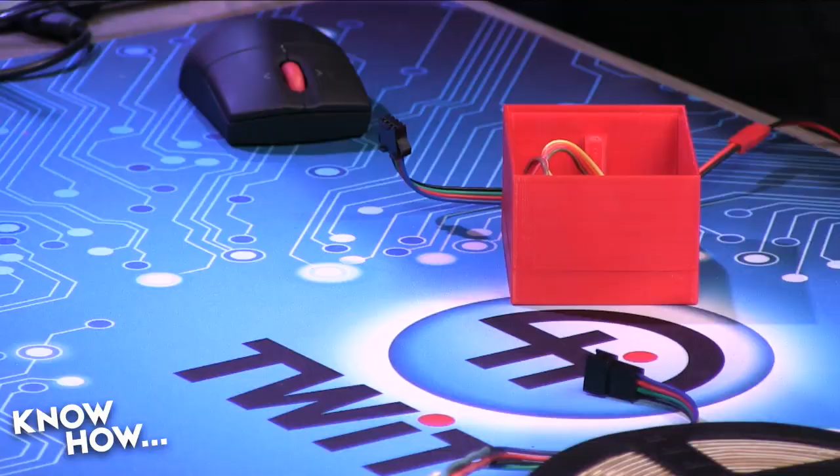Now, if you go over the overhead out here, Alex, inside, super simple circuitry. There's this, that's an Arduino. We've seen those before. Those cost about $3. This is the new piece. This is actually an Arduino-driven LED driving board.

Now, we've got a link for this, Alex. It's going to cost you about $8 to $9. I actually bought about 30 of these things, and it got the price down to like $2 each. They're really, really useful because they allow me to do something like a WS2812, but at a greatly reduced price point. A strip of WS2812s this length will probably cost me $30 to $50 versus $10. So obviously there's some price performance here.

All right, so let's look at how this looks. I've got this wired up. I'm going to give it 12 volts. I can actually give it anywhere between 12 volts and about 15 volts before burning this thing out. It's going to go through this little UBEC.

The UBEC's going to supply 5 volts to the Arduino and 5 volts to the driver board, but the LEDs are going to get the full 12 volts. And this is what it's going to do. So I'm going to go ahead and plug it into this, like so. And I'm going to take my power and plug it in here, like so. Or I'll do it the right way.

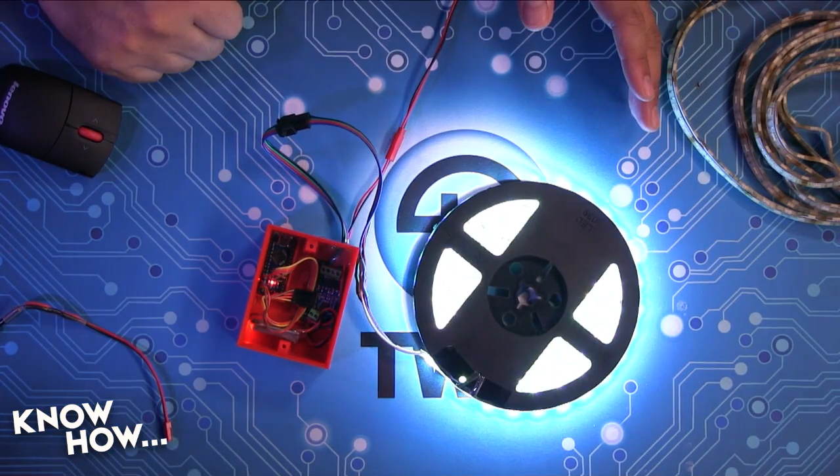There we go. So the code that I have written on there, all it's going to do is flip between the 3 colors. So it's going to go red, green, blue, red, green, blue, red, green, blue. It's sort of on an automatic cycle thing here. And we'll show you the code in just a bit of how this actually works. But this is super, super simple.

This is probably the easiest way to get your workspace illuminated, and it wouldn't cost you that much. What you see right here between the driver board, the Arduino, and the strip, this is less than $20. So for $20, you get 16.4 feet of LED strips, and you can put it anywhere.

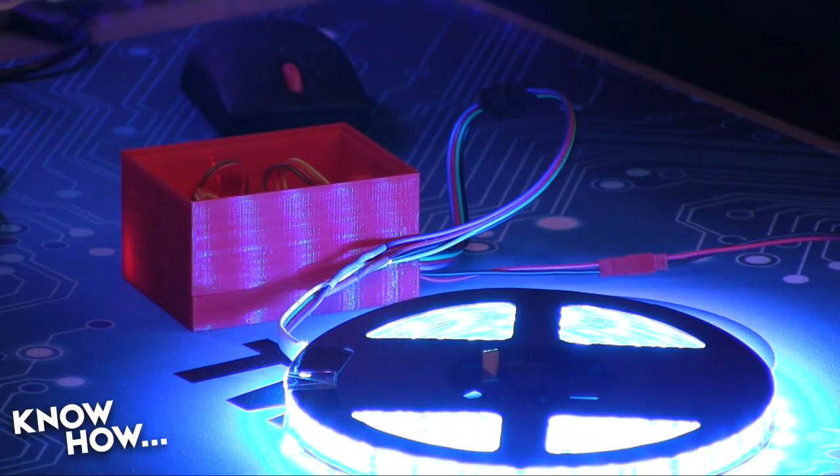Yeah, wow. Yeah, it's kind of nice. It's kind of mesmerizing, actually. Look at that, it's comfortable. Yeah. Okay, that's done. Sorry, what were you going to say? Oh, I just... waking you up from your daze, my Zen nap.

All right, so what we're going to do here is we're going to go ahead and show you a little bit of the code that actually makes this possible. Alex, if you go ahead and switch over to my computer while I get the Arduino connected, very simple code.

There is a library called rgbdriver.h. I'm actually going to include this in the file that will be downloadable via our show notes, so you don't have to copy anything off the screen. This will allow my Arduino to address the driver board, so it will give me all the language I need. Now, this just gives me the clock pin and the digital pin. Those are two things that are on the board. I'll do a full episode on this later on. You don't need to know that at the moment.

And then there's this, the setup. There's nothing, I don't need anything. It's super simple. And then for my program, I'm just running this function called fade. All this will do is it will go for red, start red at 0, and then go up to 255, and then go blue from 0 to 255, and then green from 0 to 255, and then go backwards. So yes, that's all it does.

It fades in the red, fades in the blue, fades in the green, and then fades out the green, fades out the red, and fades out the blue. And that's why it goes dark at one point. Precisely, so it's just values. Unlike the WS2812s, because we'll talk about how WS2812s work later on in the show, where I'm creating an array of data and then sending down commands for each LED, this, I only get one command. So I can say how bright is my red, how bright is my blue, how bright is my green. That's the only thing I could do. Very simple, very easy to program for it.

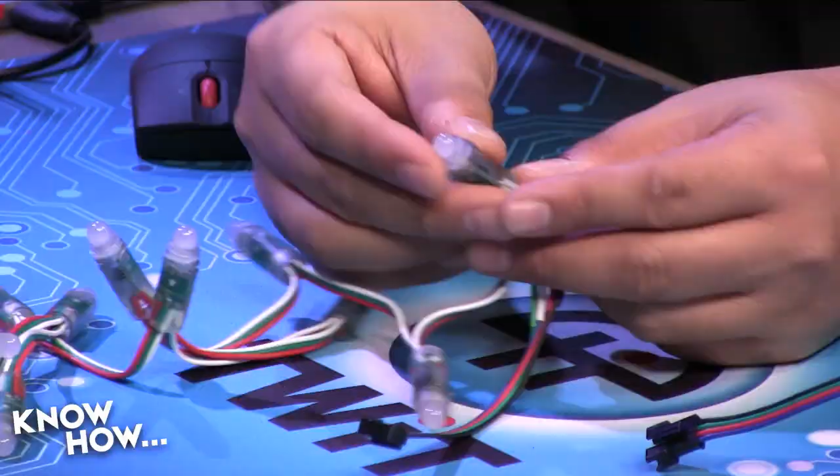If you go to the side view, Alex, I can show people. So that's the LED, that's the IC, the little chip that allows me to control each individual LED.

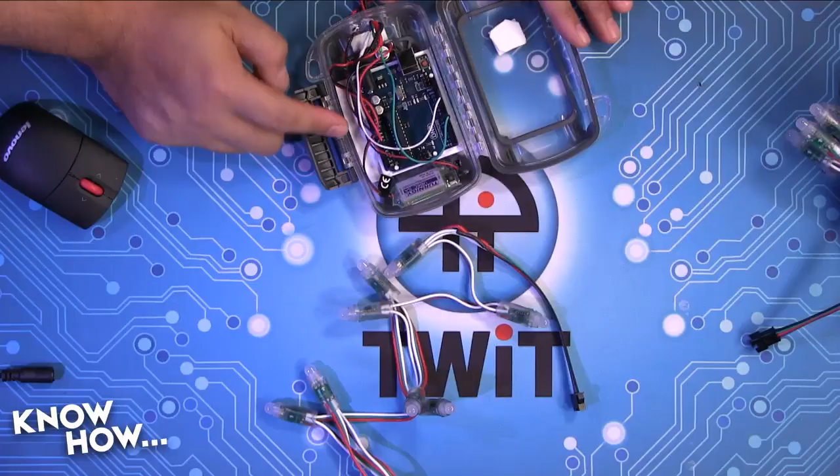We've got a project I think we made about 3 years ago. I pulled this out of my kit. This was an Arduino inside a waterproof kit. I'm going to plug this in, give it a little power. If I'm right, it should already have the code to run a strand of 50 of these WS2812 LEDs. Let me get the right power connector, like so, and I've already soldered on connectors. I actually need your side, oh it's on the wrong end. Okay, I'll just take this, plug this in, and if it's got the right code... boom, there we go.

Oh, twinkly. If you bring the lights down a little, Alex, we can get Christmassy up in this joint. Right now I'm running some default WS2812 animations, it's allowing me to go between fades and chases. You do look kind of Christmassy there. I'm a Christmas tree. You are a Christmas tree.

However, what he wants to know is, can he link another strip of lights to the end of that? So if you give me that, let's try it out. I'll plug this in... and, no.

Womp womp. The reason why it doesn't work is, remember how I told you that in a WS2812 strip I generate an array? Your array only goes up so far. Precisely, there's 50 lights inside of this. What's happening is this generates an array of 150 values, each light takes 3 of those values. So by the time I get to the last of the 50, there's nothing left in the array, nothing to pass. So these lights have power, but they have no commands.

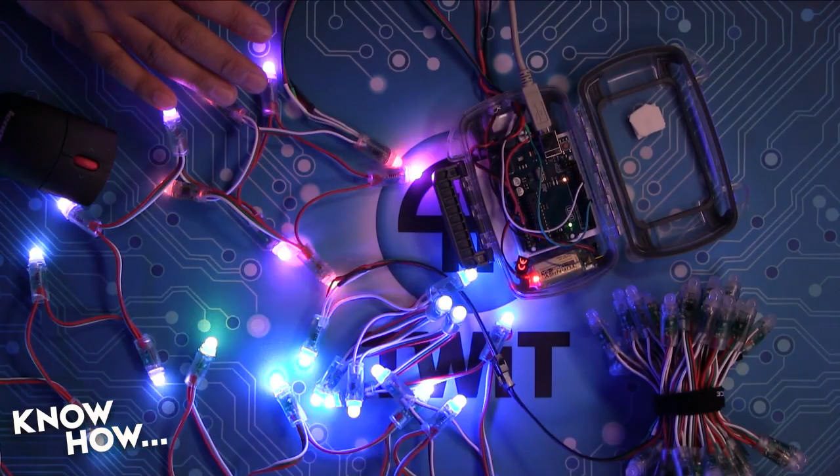Still compiling, it's about 80%. When this is done, it will upload the code to the Arduino, and automatically, assuming I've done the connections right, that strip should start to light up. Okay, here we go, so it's stopped because it's uploading. It's done uploading. And there we go. The nice thing about this is it's actually going to continue the animation pattern, so it's not just that I've lit it up. It now will do the animation over the entire string. Oh, it's starting. There you go.

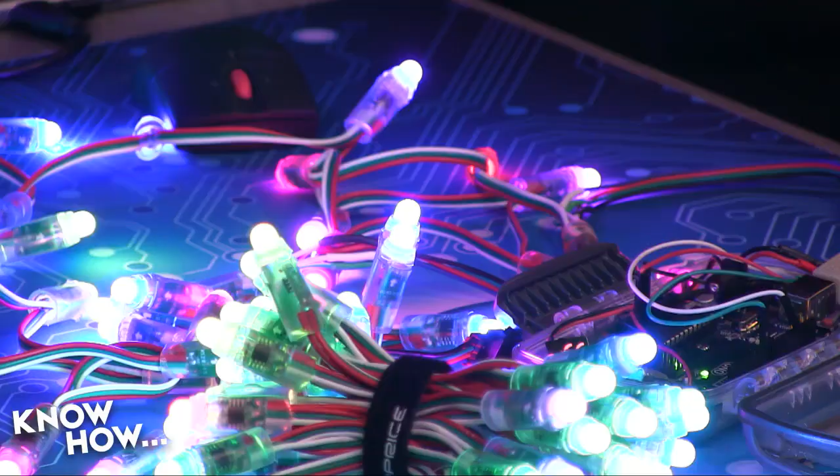Now, there is a limitation, and the limitation is all about power. Each of these will use up about 50 milliamps of juice at its maximum brightness. You add that up, and yeah, you kind of need to put a lot of juice down there. He's got a bulky power supply. At issue, though, is the fact that you can't really push that much amperage down this gauge of cable. You will eventually just burn it out.

So what I've typically done is I will send 12 volts down a parallel line, and then I will break that 12 volts down to 5 volts at the end of every strip. That way, every strip has a fresh supply of power, and it works. You can just keep putting these on as you add more lights. It's much better than accidentally setting your house on fire. Again, with the fire, my gosh, we've got so much fire.

He's got two garage doors to cover with this, so that's going to take a lot of these lights. Well, you know, actually, you can make it across an entire garage door with one string, I've done this. So if you wanted to go all the way around, you'd need three strings. Right, yeah, okay, not bad, not bad. It's kind of fun, and I love playing with WS2812s and 2811s.

Unfortunately, it's probably too late for you to order any of these. If you just have the standard WS2812 strips, the LED strips, it's the exact same code. The cool thing about this is they're designed to be hung outside, they look like Christmas lights. I can actually drop these in a bucket of water and they'll keep going.

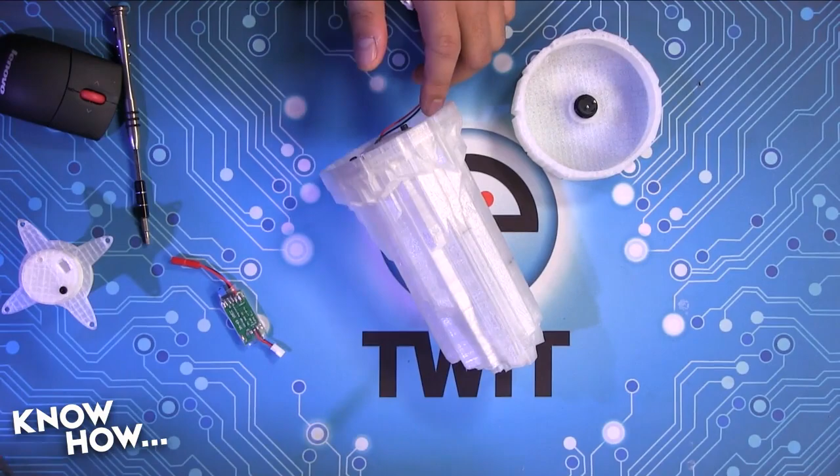This is probably - I say it's version 2, but it's really version 2.15. I've probably done 20 different iterations, and most of them I didn't print. In the early versions it was just using the standard WS2812 animation. I've kind of changed it to make it more ZPM-ish, so it does that golden glow.

Now there's a couple things we're going to have to do. First of all, the real ZPMs on the show have black lines in between the individual crystals, so that's going to have to be painted in. But I wanted to show people a little bit about the design and how we actually put this thing together. So this is actually multiple parts - you've got the shell, and I'll show you how we designed the shell in just a bit.

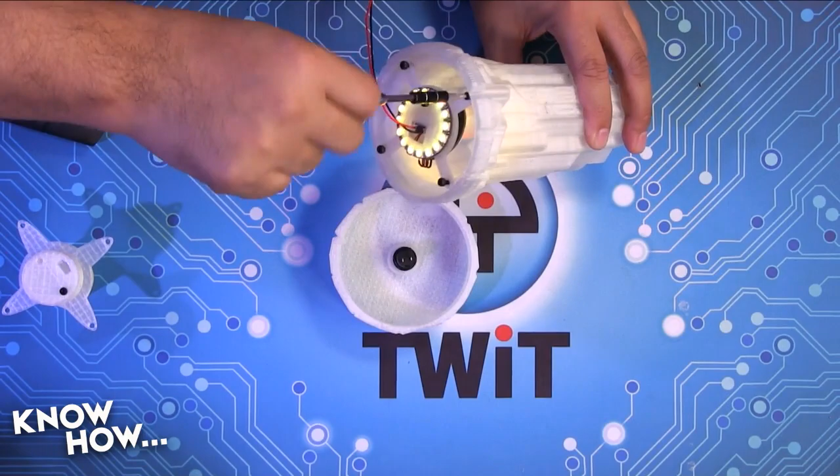But I've got this core, or what I'm calling the pod, that has been attached to the ZPM. This is how I get it to illuminate. Again, it's just WS2812, but the design allows it to illuminate things inside without being seen, because if you can see all the machinery that's causing it to do this, it kind of destroys the illusion. So what I did was I created this.

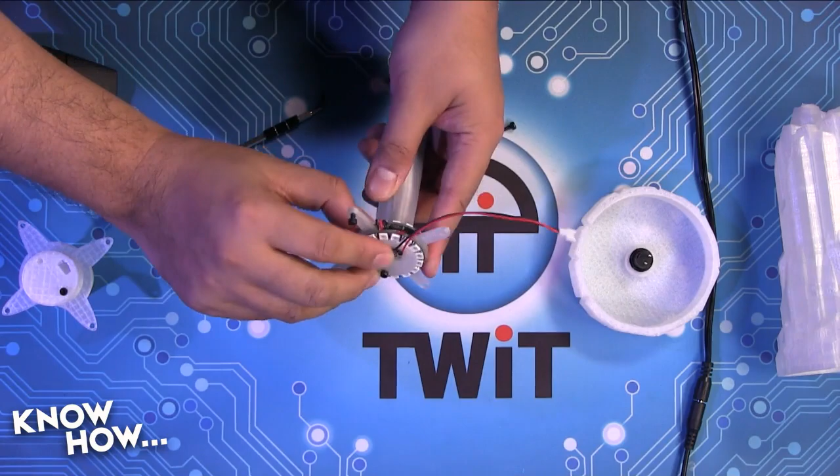Let me disconnect it so the light's not so blinding. This is the lighting pod. I've got two WS2812 rings, one on the top and one on the bottom. This long tube contains the Arduino plus a 4,000 milliamp hour lithium polymer cell, so this will drive the Arduino and the lights for something like 5 or 6 hours before it has to be recharged.

Now this is not completely done, but you can see how I've gone from the earlier design. This was an early design, same idea, where I've got LEDs on that side and LEDs on this side. In this particular case, the Arduino was stacked on top of the battery, but when I did this, the top of the shell wasn't colored because this was blocking the light. So what I had to do was stretch it out, but now this doesn't get in the way of that light. By the time the light gets up to this part, it's bouncing off so many surfaces that it's just diffuse. Kind of a cool setup.

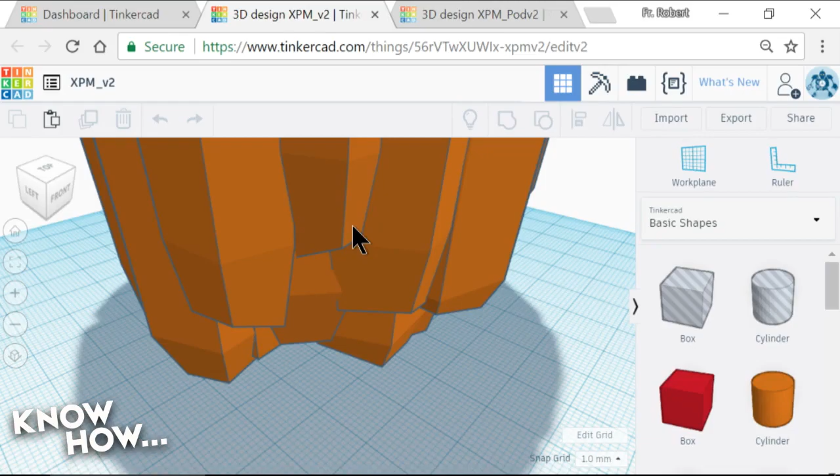Let me show you a little bit about what goes into the design. Alex, if you go to my computer - let me do this, like so. This is what it took to design this thing. So I've got this - this is the basic ZPM design. I've already combined all of the elements here, but this is going to be a disaster. Let me open this up.

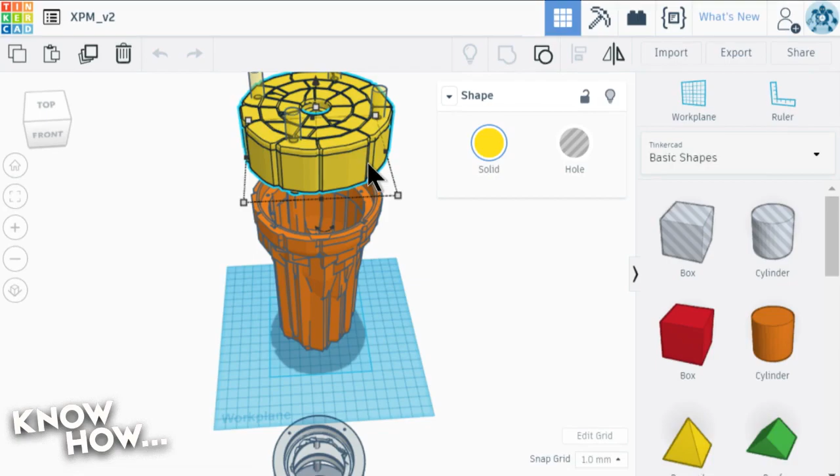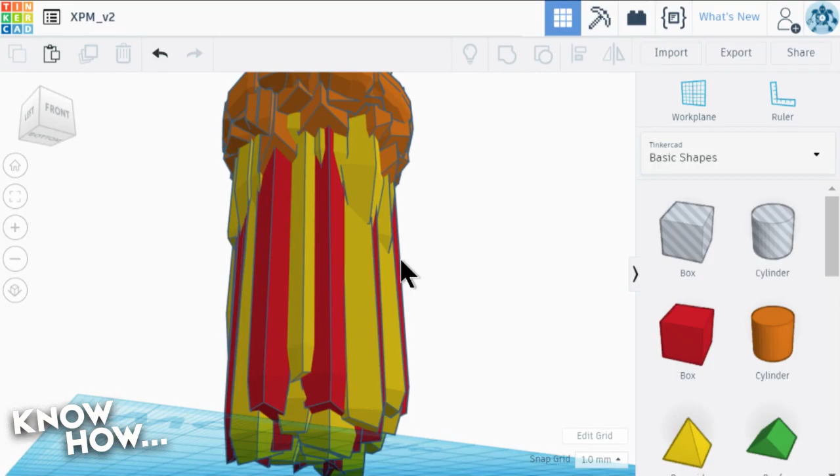In order to make that shape is actually kind of difficult. I had to combine all of these - there's probably about 60 or 70 elements inside of here. These are all columns, all crystal polygons that I created using SCAD, which is a program I'm going to show you when we actually do this project. I just kept adding them, taking them away, changing the height, changing the slant, changing the camber of entry in order to get this look.

And I have gone through so many iterations, Patrick, just to get this particular look. It's a pain, it's a lot of work. But I watched an episode last night, and it looks so much like the actual ZPM. Yeah, and that's what we're going for.

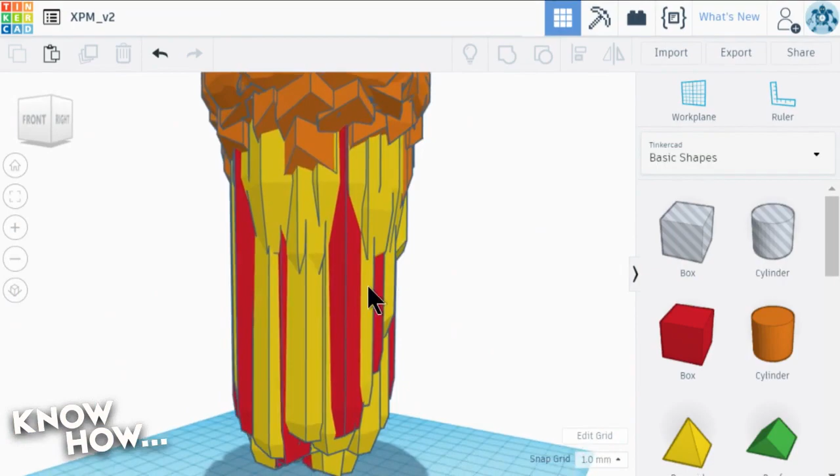Once I add the little lines, the actual black paint lines between the crystals, and once I color some of the crystals in different colors, like red and so on, it will look almost exactly like one of the movie props.

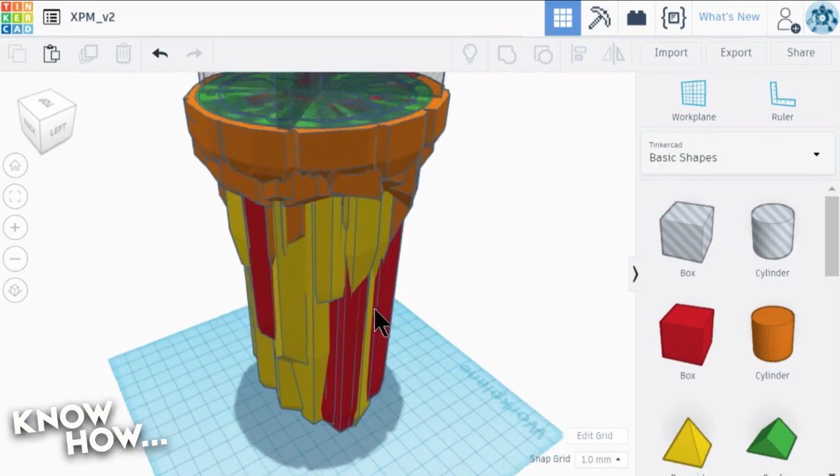And by the way, that's the only thing I had. I had pictures on the internet of how this was supposed to look. There is no good ZPM currently out there. Maybe this will be the first one.

Now there's a couple of design elements I had to do with this. Let it recombine, it takes a while, it has to go through all its calculations. Come on, do it. The first thing is, if you look down here, it's kind of hard to see.

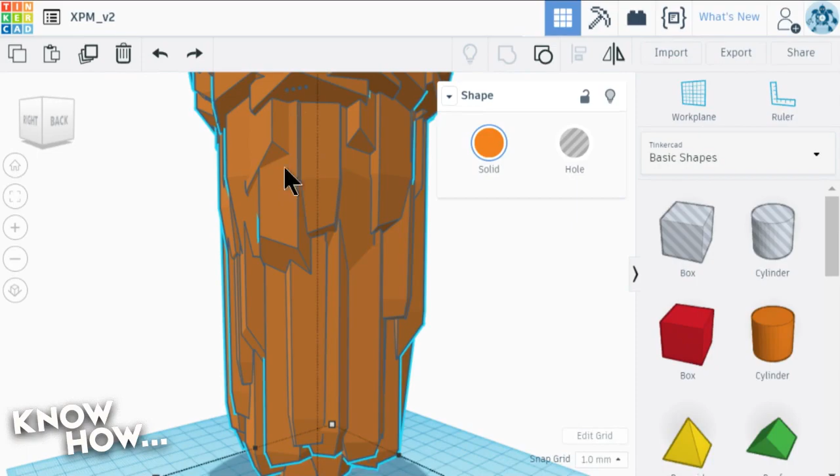Right here, there's four holes in the side here. That's actually where it's going to charge. There's a bunch of pogo pin connectors that I've put together, and they're going to be tied to the main power source and to the control buttons.

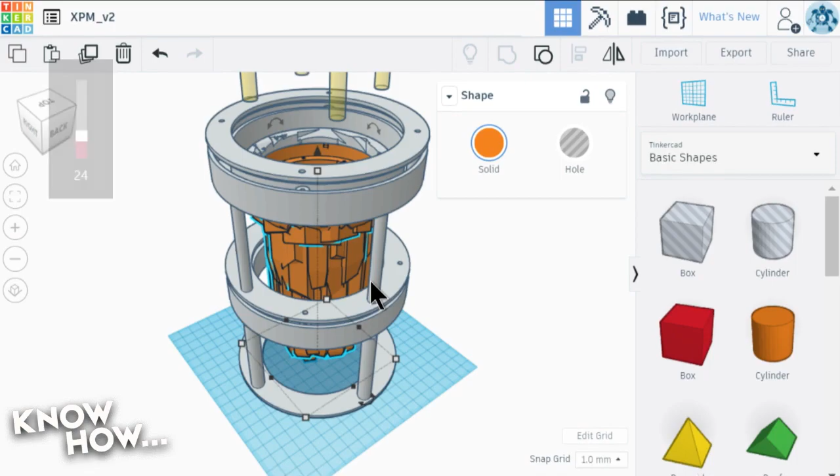So what will happen is when I'm done with this design, this is a carrier. This is also from the series, this is one of the things that the ZPM would connect into. So it's actually going to be a caddy that you plug the ZPM into, so it has a place to hold it, but it will also charge the ZPM. It will charge the battery inside of the ZPM.

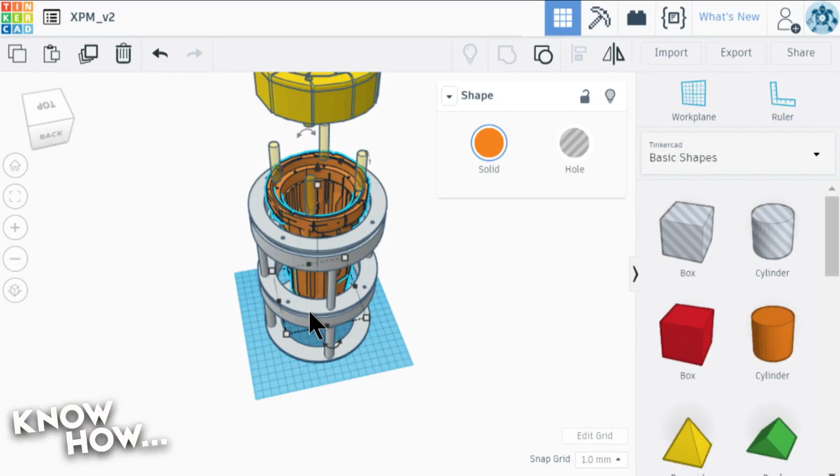Another concession that I made is the battery works at about 4.2 volts, so the brightness is going to be decreased if it's running on battery. But once you plug it into the cradle, it will have the full 5 volts, and it will be the full brightness. Wow, it's kind of fun.

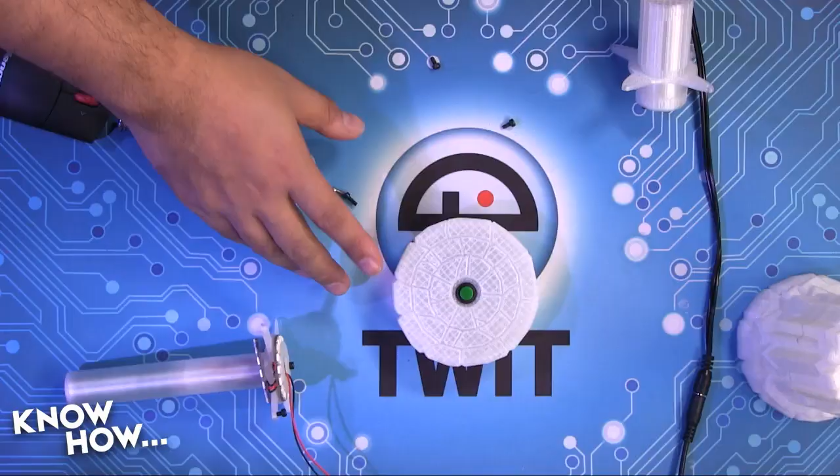Now the other things I'm planning on doing for this - I need to change, if you go to the back over to this camera, Alex - I'm not happy with this. I wanted a power switch actually on the ZPM so that I could turn it off so the battery's not always running down. No, I don't like that look. That's a horrible, horrible look.

So what I'm going to do is probably modify the switch so there's some 3D printed material on top, and I need it to glow red because that's what it does in the TV show. Yeah, there's actually what looks like a switch on the real ZPM. Precisely. So there's still a lot of work to do.

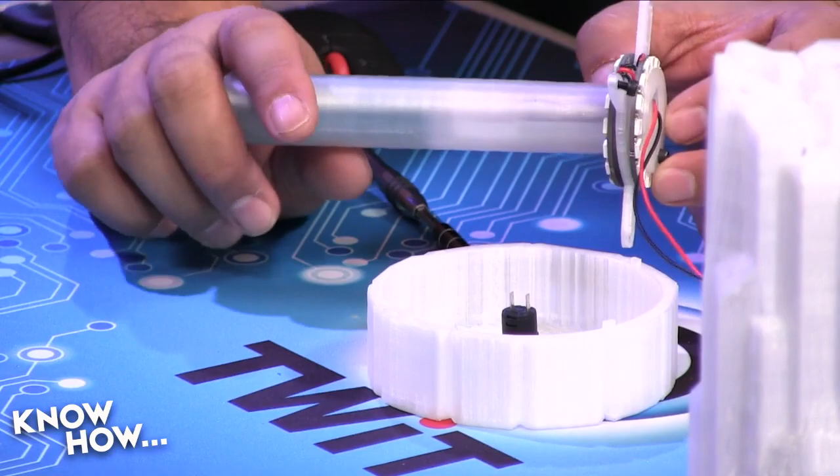I am happy with the electronics though, they're exactly how they have to be. I need to make clips to hold this down firmly, but this is not going to change. So the only thing that's going to change are the aesthetics of the ZPM.

And the cradle, I don't know if I'm going to be happy with plastic all the way through. I think I'm going to have to figure out a way to work in a little bit of steel into that thing. Yeah, that would probably look more authentic.

And the very first copy of this, when it's ready, I've already promised it's going to go to David Hewlett, who is Dr. Rodney McKay from the Stargate franchise. Fitting home for it. Exactly, exactly. But that's my thing, this is my purview, this is my universe.

I want to see something from your universe. You said you had something Star Wars-ish. Patrick, what are you going to be building for us?

It's droid time. I've always wanted a droid from Star Wars, and I'm starting - I mean ultimately I want Chopper from Star Wars Rebels. Okay, I see that. But I'm going to start somewhere simple, and it's a mouse droid from Star Wars. Aww, come on, who doesn't love that droid?

Now in the movie, they just took a remote control car and put a shell on top of it, and it became an icon. Yep. And so guess what I have to do? You have to put a remote control car in a shell, and it becomes an icon.

So I ordered this shell. This is from Granite Earth, they do runs of these vacuum-formed shells for the mouse droid. And it's actually a lot bigger than I expected. This is way bigger than what I see in the movie.